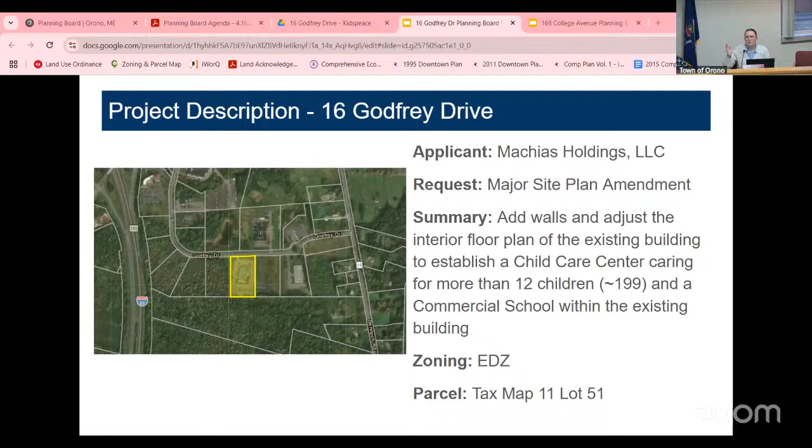I should note that the graphic on your screen is showing the property with the building on it. They also own the property to the right, which has part of the parking lot on it, and you can see that a little better in this as-built drawing. That was the as-built provided after construction was completed in 1995, and then the interior floor plan you're seeing now is what they're proposing. So same building, no additions, nothing.

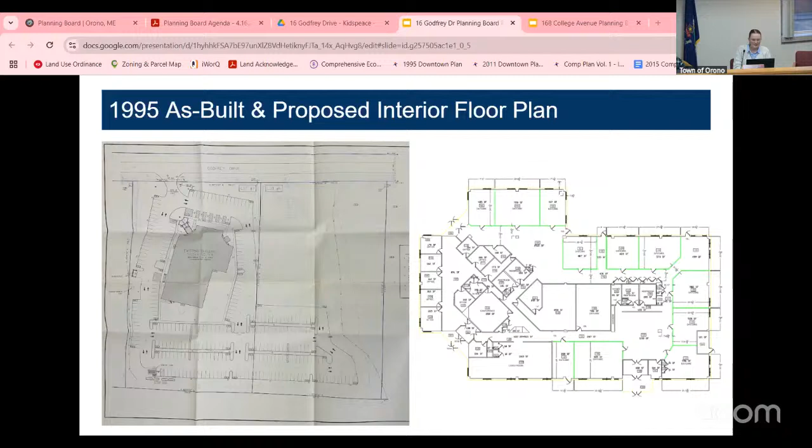So, can we ask questions now? Just wait a minute, okay, or finish up and then we'll get to it.

Please continue. With regard to buffering and screening, again, there's no exterior renovation, no site work being proposed, so there are no specific buffer strips required under section 18-126. There is a small forested buffer strip that exists between this property and the adjacent MDR property to the west, which is currently vacant.

With regard to natural areas, the site is currently developed under that site plan approved by the planning board, where the building placement and site amenities in relation to any natural features on the site were reviewed. There is a wetland on the adjacent property, I believe, but it's not impacted by this proposal. The project will continue to comply with this standard. There are no changes to the exterior of the building or the site, and no disturbances to wetlands or removal of trees are proposed.

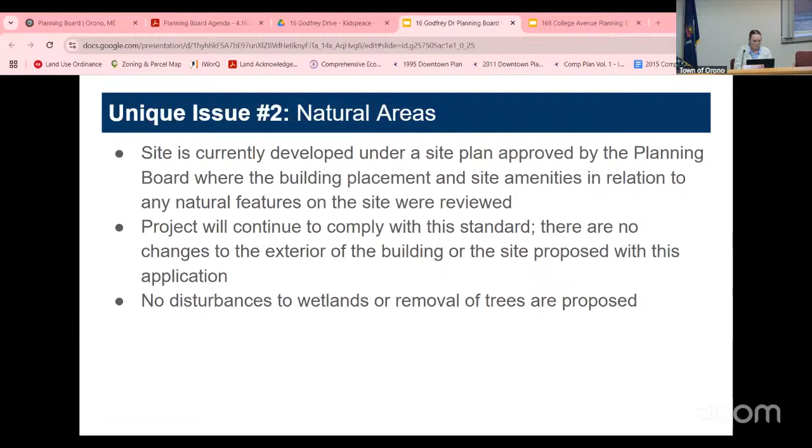With regard to traffic, access and parking, the layout of the parking areas on site and the access into and out of the site were approved as part of that previous review. Vehicle access to the site will continue to be from the existing entrance from Godfrey Drive, and sight distances continue to be met with an assumed speed limit of 25 miles an hour.

The project's expected capacity is 213, including 14 employees. The ITE Trip Generation Manual, 11th edition, projects approximately 6.23 daily trips per 1,000 square feet of gross floor area for this land use, which works out to about 131 trips a day, roughly 50% entering and 50% exiting.

A waiver has been requested for the full traffic study since this is a change of use. This was previously an existing call center, and they provided their justification in their application materials.

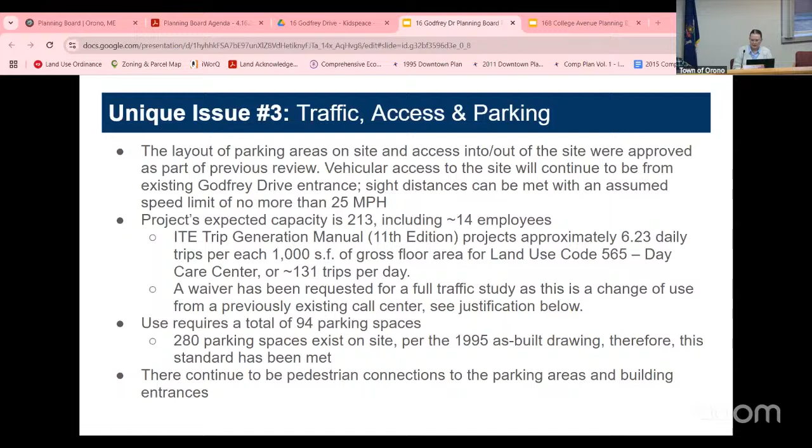The use also requires a total of 94 parking spaces. 280 parking spaces exist on site from the 1995 as-built drawing, so this standard will be met. There continue to be pedestrian connections to the parking areas and building entrances, with a sidewalk around the entirety of the building.

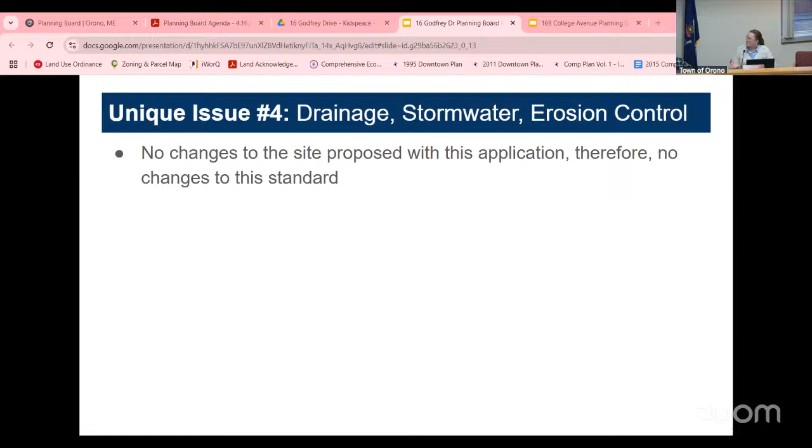With regard to drainage, stormwater, and erosion control, there are no changes to the site, so no changes to this standard. With regard to lighting and signage, there were no revisions to site lighting proposed with this application. Any future signage associated with the project will need to be reviewed by the code enforcement officer. I've suggested a condition of approval reaffirming that, in accordance with section 18-140.

With regard to utilities, the proposal will utilize a private trash hauler and is anticipated to have minimal construction demolition debris, based on what's going on site. That will be managed by the contractor, so there are no impacts to municipal solid waste.

The Orono-Veazie Water District—I reached out to them regarding capacity to serve, and they have no concerns with the capacity to provide public water to this new use. There's already a water line on site. The Orono Water Pollution Control Facility Superintendent has also provided a capacity to serve letter for the change of use; I believe I provided a copy of that email in your packet. The project will take advantage of existing utilities already available at the site. There are no new utilities proposed.

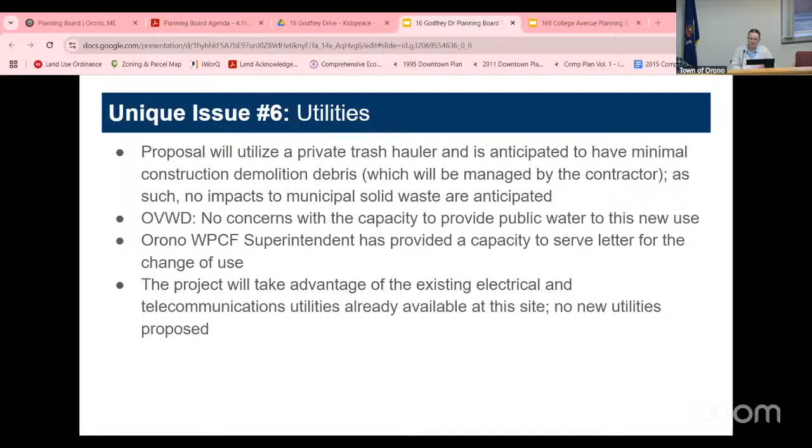With regard to waivers, there are a number of waivers outlined in my review memo, mostly related to construction, but again they requested a waiver regarding the full traffic study. They've justified that as not applicable given the previous use of the site as a call center, and given that no changes to traffic movement throughout the site are proposed. Staff is in agreement and comfortable with these items.

I'm offering four standard conditions: the requirement to return to the planning board if anything changes with the plans or the findings we've outlined; a requirement to obtain a building permit from the code enforcement officer, which they have submitted for; noise will be regulated, and applicants are advised to familiarize themselves with our noise ordinance; and any future signage is to be reviewed by the code enforcement officer prior to installation.

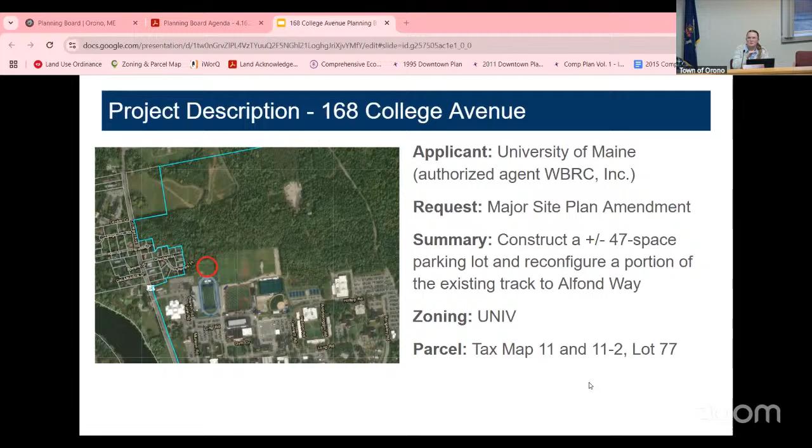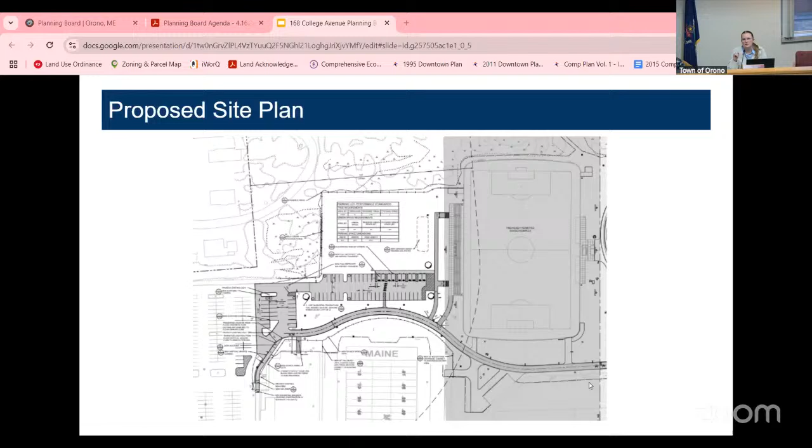With regard to buffering and screening, there are no specific buffer strips required under section 18-126. Section 18-126E provides buffering standards relating to parking areas, noting that the required buffer strips shall be consistent with setback requirements, which in the university district is none.

Regarding natural areas, the proposed parking lot and accessway is being developed on previously developed land that was used for track and field throwing events. The proposal is located over existing developed areas to minimize impacts to natural features.

There are some wetlands near the project site, all shown on the submitted plans. Some of these wetlands were already impacted by the track and field throwing areas, as shown on the existing conditions plan.

They are proposing about 1,500 square feet of wetland impacts that has been previously permitted under a Maine DEP permit referenced here. There are no protected wildlife areas or habitats within the vicinity of the project site from available state mapping, and there are no trees proposed to be impacted.

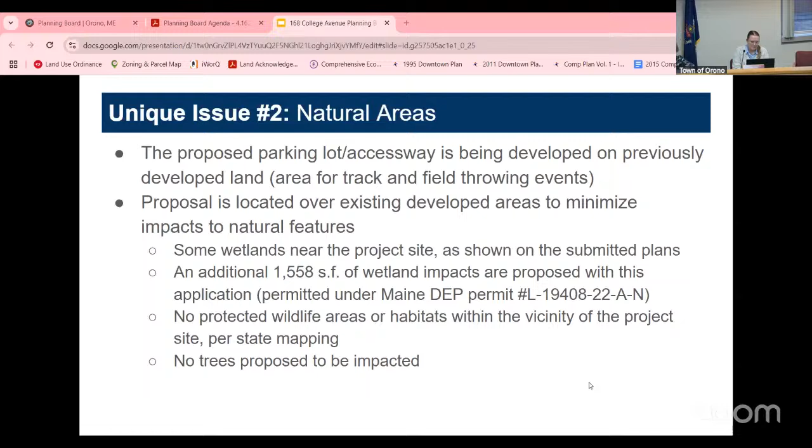With regard to traffic access and parking, vehicular access is to be provided from the Alfond satellite lot by way of Long Road, a private road interior to the campus, or Branch Road, same thing. This section of the campus is primarily accessed from College Avenue, but there are a number of ways to access the area.

Vehicular circulation in this area associated with the new parking lot will have new striping to provide clear delineation of vehicular circulation paths, in an effort to improve safety for the movement of passenger service and emergency vehicles throughout the site.

The parking and maneuver layouts for internal movement were reviewed by the fire department and no concerns have been raised. Sight distances can continue to be met with an assumed speed limit of no more than 25 miles an hour in a parking lot, probably a little slower than that.

The parking lot will be constructed to add ADA spaces adjacent to the soccer field and replace some of the parking spots lost from recent athletic facility improvements at Alfond Arena. We also reviewed that Alfond Arena change previously, when a number of parking spots were removed, so a few of them are being replaced over here.

There are no new buildings or infrastructure that would generate additional traffic being proposed here. The proposal provides for pedestrian walkways within the development appropriate to the type of development, and the new Alfond Way will be utilized for pedestrian movements as well as access by university maintenance.

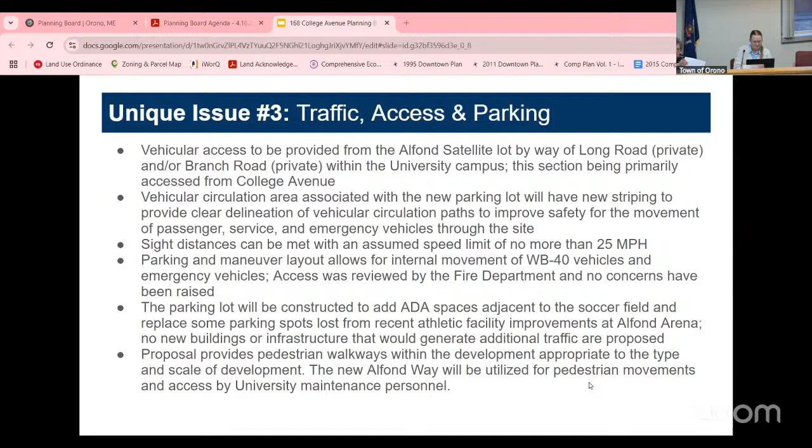With regard to drainage, stormwater, and erosion control, from pre to post development overall impervious area increases by about 1,700 square feet over the throwing sports area with the new parking and maneuvering area, but impervious area will be removed from the Alfond Way area with the removal of the track, so that's a net increase of about 1,700.

To minimize impacts to the wetland area adjacent to the Charles Street neighborhood and respond to comments from the town's engineering peer reviewer, the design redirects stormwater from a portion of the existing parking area to the university's closed drainage system, decreasing water volume to the adjacent wetland area from pre to post development.

Post-development modeling for 2, 10, and 25-year storm events shows that both peak flow rates and runoff volume will be decreased at both study points—that wetland area and another area on the developed part of the site.

An erosion and sedimentation control plan was prepared to minimize soil erosion and chances of sediment being transported. These measures will be implemented meeting the specs contained in Maine DEP's Best Management Practices Manual.

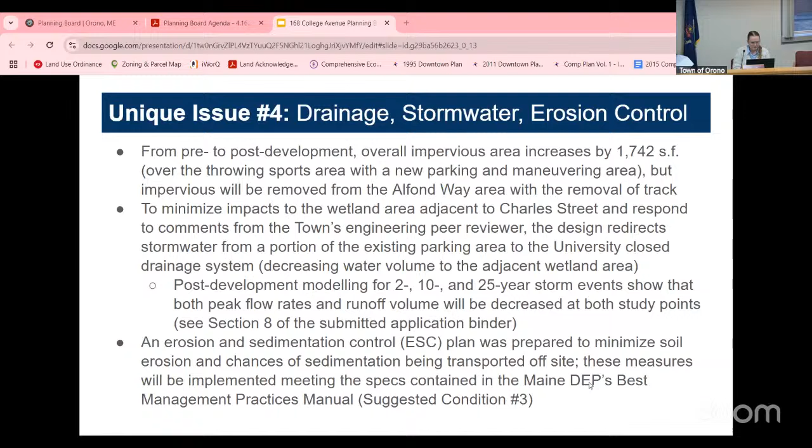With regard to lighting and signage, cut sheets have been provided for the proposed parking lot lighting. These show the proposed fixture is rated between 5,000 and 28,000 lumens, depending on brightness, which is controllable. All fixtures are downcast or shielded so that no light is emitted above the fixture. They've provided detailed lumen calculations and detailed views on the submitted cut sheets within the application materials.

A photometric plan has also been provided showing that no light is visible off the property line. Right after you get off the proposed parking areas, the light tapers off to less than 1 foot candle in most places almost immediately.

Any future signage is required to be reviewed by the code enforcement officer, and I've suggested a condition to reiterate that should this project be approved.

With regard to utilities, the only new utility is the electric service for the parking lot lighting, and that will be undergrounded consistent with our ordinance requirements. There are no other utilities, including public water supply or public sewer systems, required or proposed with this application.

There are a number of waivers. This is an amendment to a previously approved plan. Given the size and scope of the proposed project, items related to sewage disposal, building, and any agreements such as easements or agreements for public space, which would not be applicable to the proposed project, are requested to be waived. They've detailed these and their justification in section 10 of the submitted application book, and staff is in agreement with these items. With regard to recommended conditions, we have our 4 standard conditions of approval.

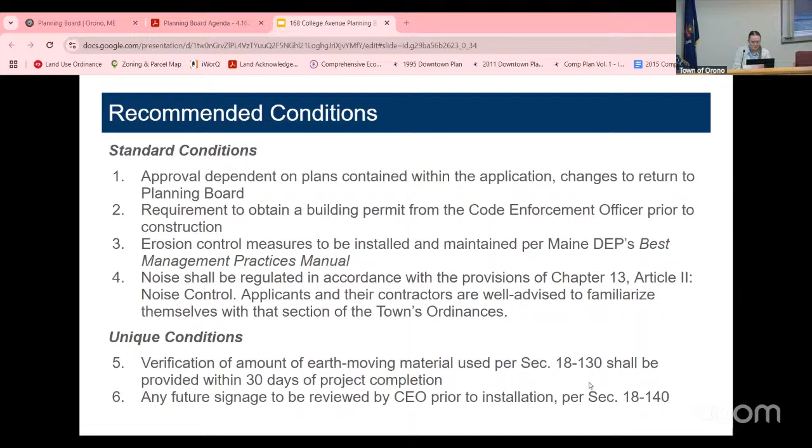With regard to unique conditions, this is a project that is actually only before the planning board because it is required to be here for earth moving. More than 100 cubic yards of earth moving material is involved. Under section 18-130, a verification of the amount of earth moving material used must be provided to the code enforcement officer within 30 days of project completion. Again, any future signage is to be reviewed by the code enforcement officer prior to installation. That's all from me.

Very good. Toby, do you have anything to add?

Toby from WBRC. I want to add that we do understand, we've been here several times in front of the board with the Alfond project. I remember specifically from the soccer project the concern with the amount of water volume going towards Charles Street in that wetland area.

So we did our best to minimize the amount of runoff heading towards that area, and we did decrease the volume of water as well as the peak flow heading in that direction. The nice thing about where this parking lot is going is it provides ADA spaces for athletic events right next to soccer, right next to football. They're really short on ADA spaces when it comes to special sports events, so we were able to provide more in that spot. That's all I have.

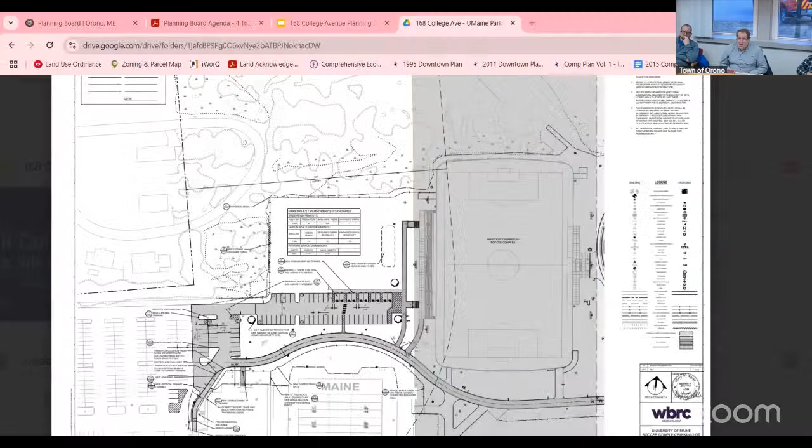So if you're looking at it on the left-hand side where it's gray, that's all existing parking, part of the Alfond satellite lot. What we're doing is regrading that area so that it drains towards Alfond Way, the serpentine road that goes up around the end zone of the football field. All that area right now is currently impervious, and we're taking that all out, putting grass in and putting in Alfond Way, a large pedestrian way and service way for the university. So the area that's existing pavement of the Alfond satellite lot is being regraded so it all drains towards Alfond Way, and there's a catch basin that we're collecting it with, sending it towards the football field.

I did see that in the grading plan, there's one low spot. Good. Just a question too.

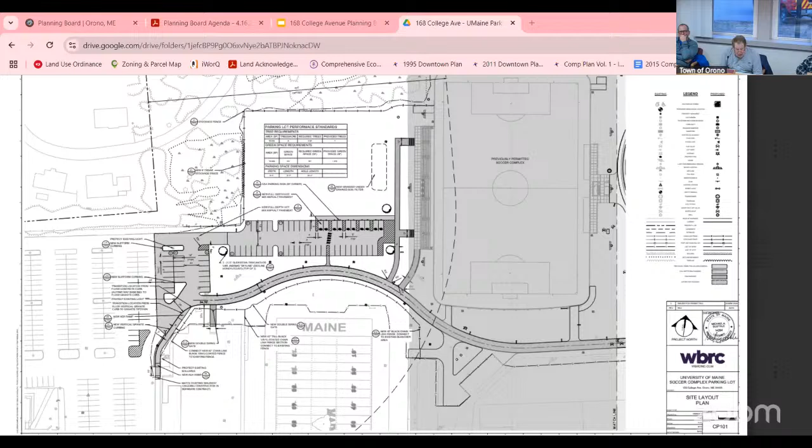I'm not as familiar with the area, but I know it shows an existing stockade fence around the perimeter of the throwing area, and it appears that you're adding to that for screening along the wetland. Could you just clarify? It appears to show up on the plan, but I just want to make sure I understand what your proposed new fencing is and where that's going.

My understanding is that we're proposing to continue that fence all the way through to delineate that area from the abutting wetland area. So it's, most of the perimeter's enclosed and you're going to fill in the gap. Yes.

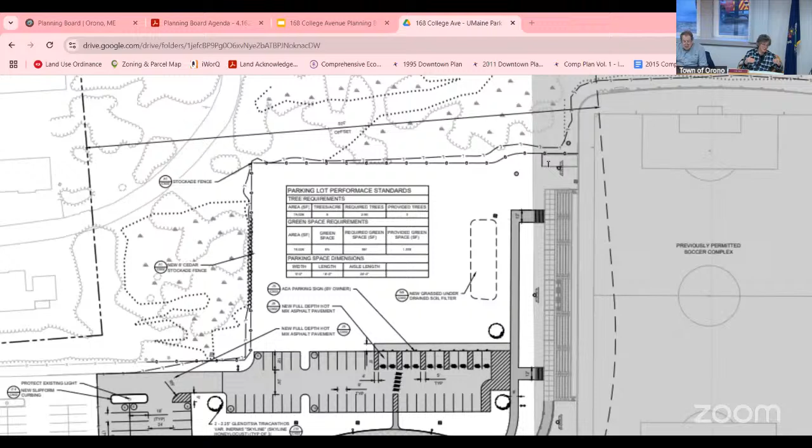I live right across the street from this. There's a pathway from Charles Ave that comes into the existing parking lot. There's a break in the fence, and a lot of people use that pathway. I'd like it to be preserved.

When you say that, do you mean at the existing Alfond satellite lot? Yeah, well, it's not quite - if you move your cursor to the right a little bit, it's right around there. I walked it today, so yeah.

I got to see - I was wondering what all that construction was. Well, the construction that you're seeing now is the soccer field and track and field.

What's happening at the other end then? The track - so the track is no longer going to be around the football field, it's actually moving up. I was trying to figure that out because you did a bunch of work and you're taking up pavement. I was just trying to figure out how you're gonna blend it with the existing track. Isabel can correct me if I'm wrong, but that doesn't require planning board approval, but we did get site plan approval for that work, which is separate. So it's a large master plan for the athletic events - we did softball, field hockey, now track, field, soccer is being done.

So getting back to my question - I don't know, to be honest with you. There's a fence that is up against the last house right prior to the wetlands, and people walk along that fence. I don't know who owns that, but the neighborhood uses it. So I don't know, I'm looking at the lot line - the fence has got to be on the house side of the lot line. So is it on university property or is it? I don't know, I don't know.

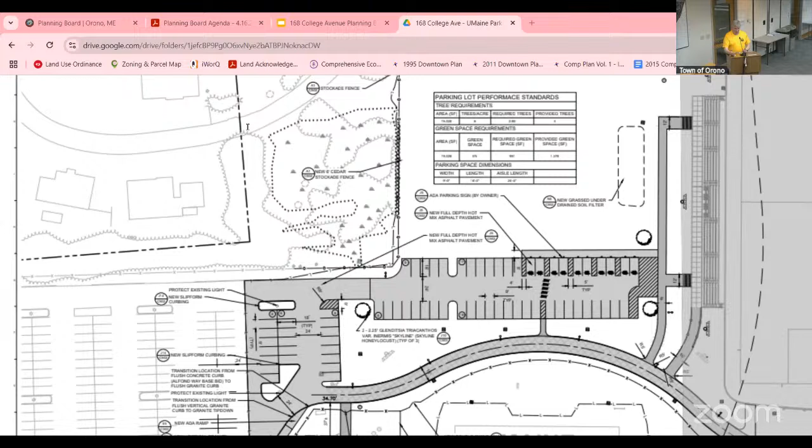There's a line of pine trees. So people who walk on the east side of the pine trees are on university property. If they're on the west side of the pine trees, they're on private property.

Okay, thanks - does that help at all? No, that's helpful. Thank you. All right, so further questions before we open up public hearing?

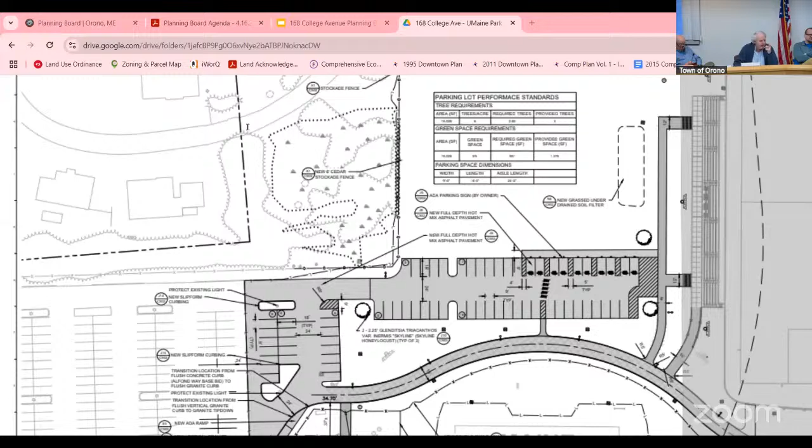That pathway, is that like the continuation of the pathway that passes by the baseball fields? Do you mean Alphon Way, the new Alfond Way? Yep, it is. So it's coming from the men's baseball field, women's softball field, and then it's...

Yep, it's going to go up all the way around the field hockey area, and there's a small cul-de-sac. It's tiny, not really for traffic, because with the new construction on campus...

Later, students' access to Alfond and the football field will be changed because they won't be able to walk that way. So is that how students will come from the dormitories to games? Typically, when I lived on campus, we'd just go right down Long Road and cut across the large parking lot in front of Memorial Gym.

So typically, if students come down the back way, from Hillside and that area, they go on the southern side of the football field. Because there's a way along the north side of Memorial Gym, by the dome.

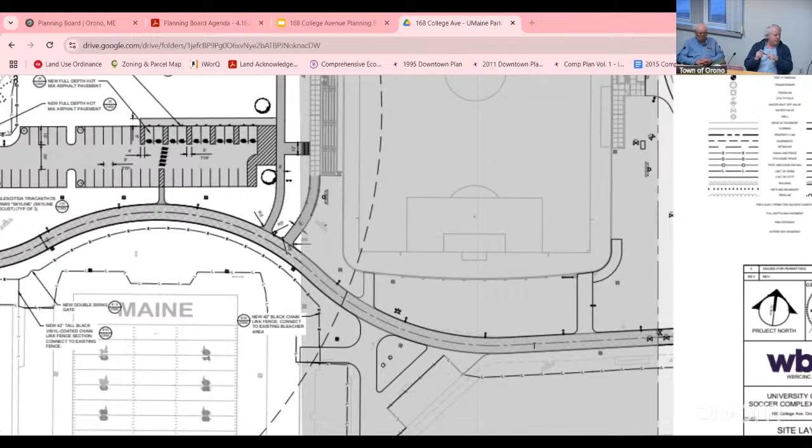Okay, that's all. Just recalling that last time there was a fair bit of discussion on parking and the improvements in front of Alfond, which I guess improved access to that front entrance. There was concern about spots being removed, and this would appear to address that as well. So that's a bonus. Further questions before I open it up? All right.

Open up the public hearing. Isabel, well, actually, step right up. We have somebody waiting, Mr. Major.

Just a couple of questions. First, I love the plus or minus 47, but it sounds like it's 88 spaces. That's a lot more than a plus or minus. Just from a standpoint of how many spaces were in this piece right here, what is that discrepancy? Because I agree, that's double the size, almost double the size. How many spaces do you have?

You said I thought you said 88 earlier. Did I? No, it's only 47. Okay, perfect. ADA. Okay, Americans with Disabilities. Okay, that's right. Good, good.

Then I have a question about the lighting. It talked about the downward part of the lighting, and it'd only be off a couple feet from the property line. Define the property line we're talking about - is it next to my house or the property line of the parking lot? Sorry, I hope I said parking lot, not property line.